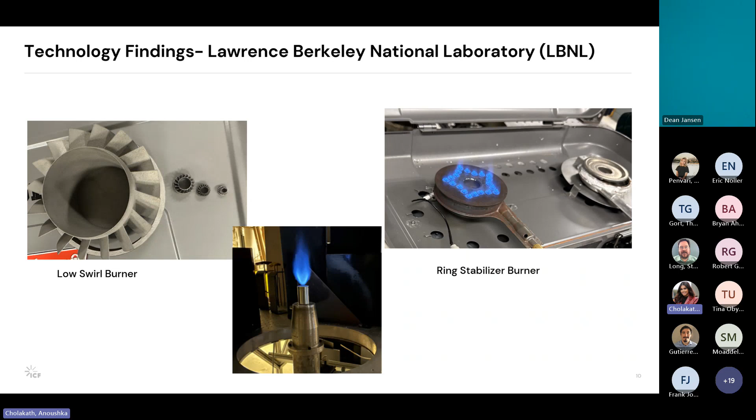Since then, they have looked into other applications such as water heaters, but as of the time this interview was conducted, development had stopped due to the pandemic and has not yet resumed to my knowledge. Overall, both burner types are scalable and fuel flexible. Scientists at LBNL have called for further studies to fully optimize them for specific applications.

Moving on, we interviewed experts from ClearSign. They are a burner R&D company developing burners for commercial and industrial markets. They have a patented technology which they call the ClearSign Core technology.

This consists of air fuel premixing, internal flue gas recirculation, and their patented distal flame holder technology. To my knowledge, this is the only burner manufacturer that uses this unique combination of combustion elements in their fuel burners.

ClearSign has 3 ultra-low NOx burner products. The first is their process burner. They have a partnership with Zeeco Incorporated to develop and sell the ClearSign process burner. Applications for this involve heavy refinery fuels up to 80% hydrogen.

ClearSign had expressed interest in looking into other applications using their process burners, such as steam methane reformer heaters and ethylene cracking furnaces.

ClearSign also has a boiler burner product. Rogue Combustion is the exclusive partner for selling this boiler burner, and I'll talk a little more about this in the next slide.

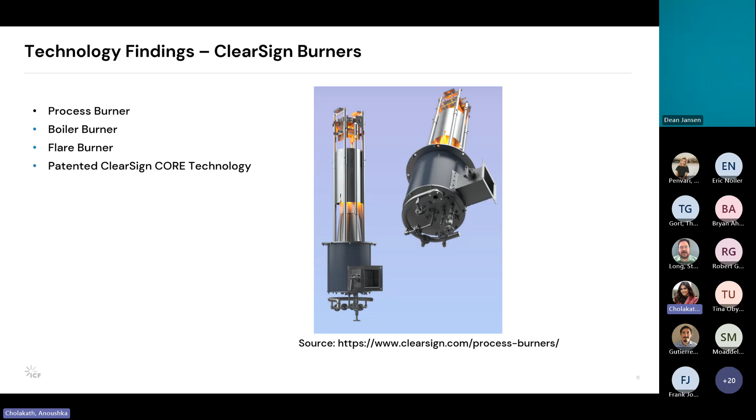As of when we conducted our interview with ClearSign, they have supplied 7 flare burner retrofits in the Central Valley for oil production facilities. ClearSign representatives have also stated interest in developing their product for other applications such as coker heaters, which are also used to deal with heavy crude oil.

As I mentioned earlier, Rogue Combustion uses the ClearSign technology for a fire tube boiler burner, and this product can be supplied for new boilers or retrofitted into existing boiler equipment.

We were able to conduct a site visit to their testing facility, and the engineers there were able to tweak the burner to operate right around 1 ppm NOx and demonstrate its operational flexibility.

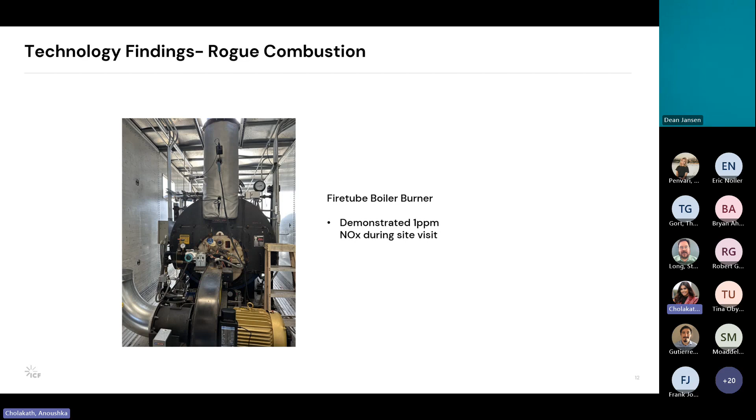From my conversations with the engineers, they have expressed interest in exploring other opportunities for optimizing this burner, as well as looking into water tube boiler applications.

The next organization that we interviewed was PowerFlame Incorporated. They have 3 commercially available ultra low NOx burner offerings.

The main features of these burners include a pre-mixed firing head in their Ultra C-Max burner and a metallic firing head in their NP2 burner.

Regarding the applications, the representatives we spoke to claimed to retrofit boilers with their ultra low NOx burners fairly often and have been pretty successful in doing so. They've also applied their burner to other process heating applications, such as furnaces, bath vaporizers for liquid natural gas conversion, autoclave ovens, and even distillery and brewery facilities.

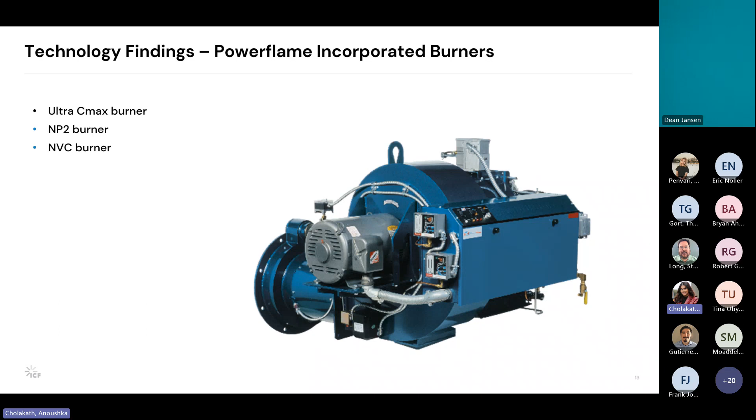Another company that we spoke to was Vitotherm. Vitotherm is an R&D company based in the Netherlands, and they are working on a new ultra low NOx burner line that is expected to be released by the end of 2023, and this would be their first ultra low NOx burner offering.

A unique characteristic besides their burners being ultra low NOx, they also have a zero carbon monoxide component since they're primarily focused on indoor applications, specifically greenhouses. Their main customers in California so far are the Greenhouse Valley and the Central Market, but they have expressed interest in looking for other partners and applications for their burners here in California.

Moving on, Honeywell has designed and fabricated the next generation of their Oxytherm burners. This technology uses a patented staged oxygen design, which they claim improves the overall heat transfer and can significantly reduce NOx emissions. This burner runs on close to pure oxygen as opposed to traditional burners, which use air, which is 21% oxygen, 79% nitrogen.

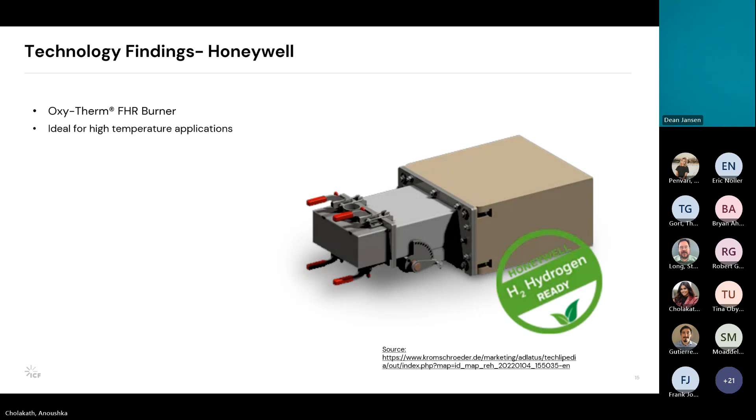This is another company we were able to connect with at the AHR Expo. They have two ultra low NOx burners, the tube burner and the inward fired cone IWFC burner. They use a proprietary metal mesh firing cone for their burner system to help with efficiency and NOx.

They've applied this technology in a variety of applications, but particularly a lot in the commercial food service industry, including coffee roasters, baking ovens. They've also installed this burner for industrial applications, including furnaces, paint curing, sugar condensing, as well as outdoor IR heating.

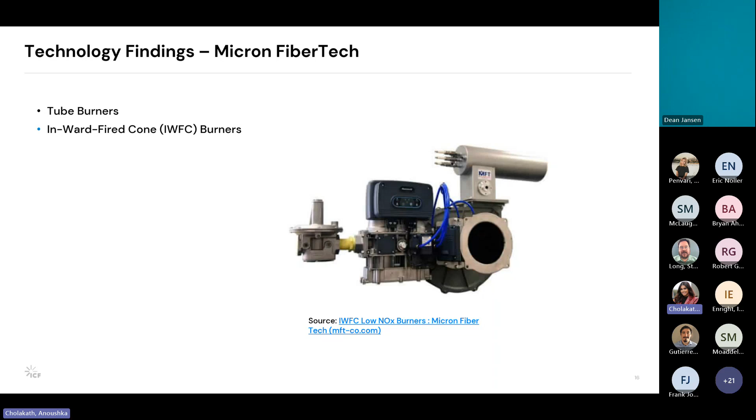Next is Cleaver Brooks, and they have an ultra low NOx burner model called the SBR5. Their technology uses a forced draft design, which controls the air and the fuel mixture, resulting in near complete combustion with near zero carbon monoxide emissions.

There are a variety of applications that this burner can be used for. They've successfully applied this to boilers, industrial processes, waste heat recovery. They've retrofitted this burner into a hospital for steam usage, laundry, dry cleaning, as well as refinery and petrochemical applications.

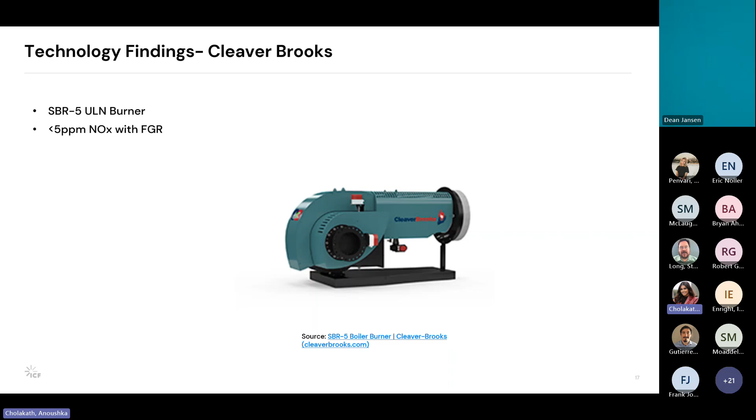CIB Unigas is an Italian burner R&D company that offers ultra-low NOx burners in parts of Europe. But they have very recently installed their first burner in California as of earlier this year. The burner that they recently installed was not an ultra-low NOx burner. However, they are working on developing their ultra-low NOx burner line and are currently in the design phase of that.

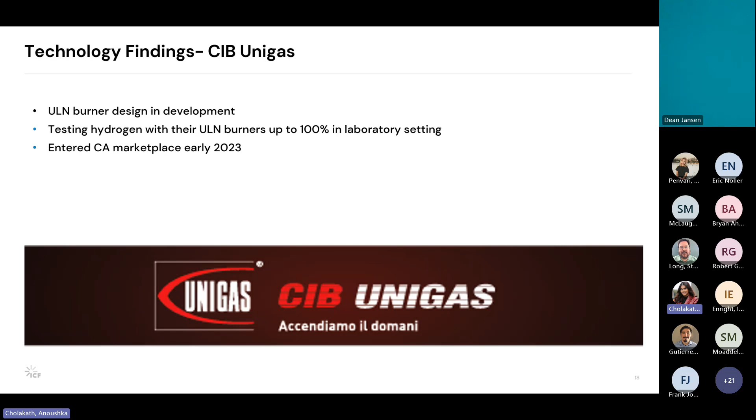In a laboratory setting, they have tested their burner up to 100% hydrogen fuel and are using a mix of staged combustion design and flue gas recirculation to achieve the ultra-low NOx levels required here in California. I don't have an exact timeline of when these burners will be commercially available, but they did express interest in expanding into the California marketplace.

So the last couple of companies mentioned here, we were not able to get a hold of them for a longer interview or a site visit. So most of this information is purely from research conducted at this point.

Alzeta Corporation offers a few ultra-low NOx burners. Their burners utilize a pre-mixed surface-stabilized combustion process that offers uniform heating to operate at very low combustion temperatures. The CSB burner is a metal fiber burner, and the Duratherm burner uses a ceramic fiber specifically used for applications that require a low heat flux and uniform heating.

The Alzeta NanoStar burner was developed as an ultra-low NOx solution for industrial gas turbine applications specifically.

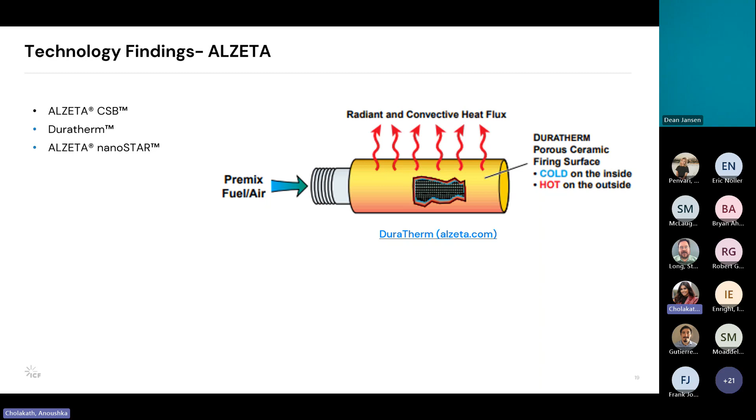Moving on, Altex Technologies is an R&D company that focuses on combustion systems, and they have developed the next generation ultra-low NOx burner along with support from the CEC, and they call this the near zero NOx burner. This technology is a multi-flame zone burner that integrates a post-combustion NOx reduction process as well as an in-furnace NOx reduction process, allowing them to achieve emissions under 5 parts per million.

In their report, they've also noted that this burner can be commercialized and optimized for boilers, water heaters, and process heaters.

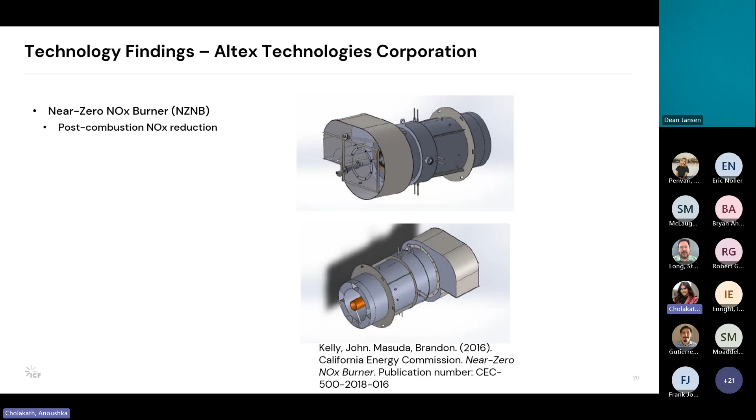All right, Linde Technologies offers what they call a flameless oxy-fuel burner. They have recently improved their oxy-fuel combustion process to meet the stricter emission standards. Like the Honeywell technology, this product also operates close to 100% oxygen instead of air. They've also tested this burner with hydrogen as well.

They are currently planning a field demonstration for this burner using 100% hydrogen fuel in a steel producing furnace. As of when the research was conducted, this field test hasn't happened yet, but I would say stay tuned for that, or reach out to the company for more details going forward. This is something they have planned for hopefully later this year.

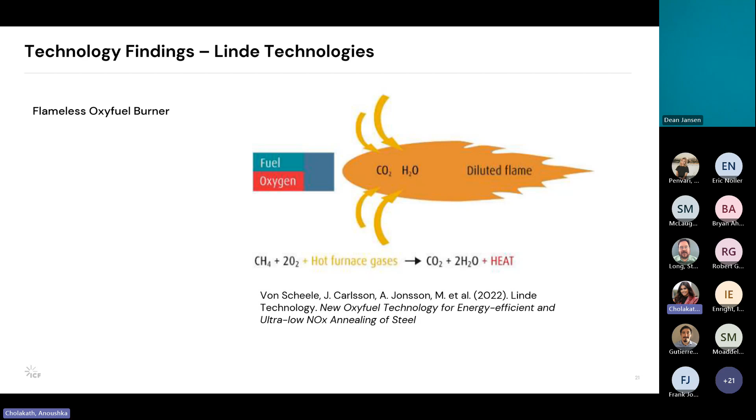Moving on. The Swiss Federal Laboratory for Material Science and Technology have developed what they call the catalytic hydrogen combustion burner. This process uses a catalytic approach using platinum-coated silicon carbide foams with non-premixing hydrogen and air.

The way this works is hydrogen is supplied from below and air is blown between the two platinum-coated silicon carbide discs, which leads to a homogeneous air distribution and a uniform catalytic reaction of hydrogen and air. In a lab setting, the scientists were able to perform tests at various hydrogen flow rates.

They have expressed interest in further development for industrial manufacturing for stoves and other commercial cooking appliances, which is currently in progress. We weren't able to get a hold of them for any further updates since when the study was published.

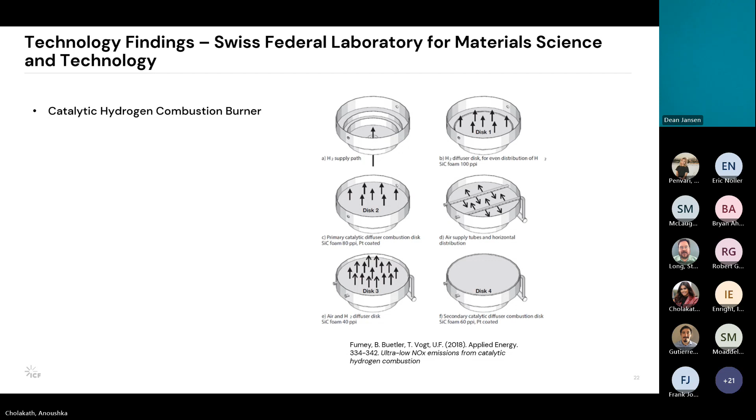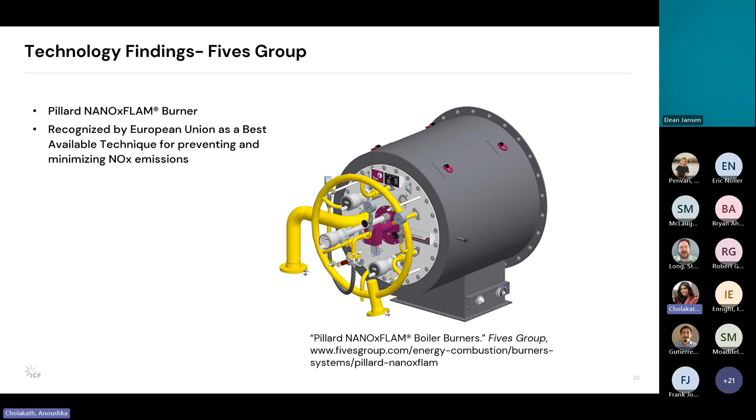All right, the Fives Group is another company that specializes in machinery and processing equipment. They have designed and manufactured what they call the Pillard NANOxFLAM Burner, and this uses a unique patented technology to control the flame temperature and improve efficiency. This burner was recognized by the European Union as a best available technique for preventing and minimizing emissions. The main market for this ultra-low NOx burner is primarily in China and Korea. They've applied this burner for both fire tube and water tube boilers.

All right, moving on. John Zink Hamworthy Combustion has a few ultra-low NOx burner offerings. Firstly, their Coolstar burner uses their proprietary flue gas entrainment and air and fuel premixing technology to control the flames and achieve low emissions. This burner is mainly suited for larger processes like coker heaters, crude and vacuum heaters, and ammonia and hydrogen reformers.

The next burner offering is the Solex burner. This one has the lowest emissions of the three, around 5 ppm, as well as near zero carbon monoxide emissions. The Solex burner uses their patent pending air mix and cool mix combustion process to create a shorter compact flame length, which they claim to be very efficient.

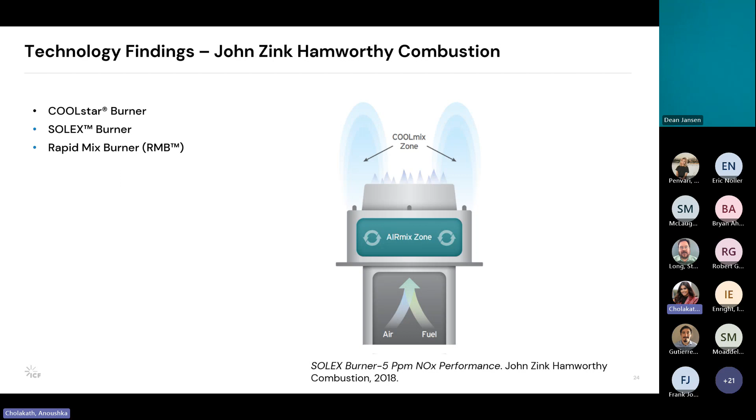Finally, the Rapid Mix burner uses a gaseous injection and mixing system that they use to maximize efficiency and help lower emissions to under 9 parts per million of NOx. This burner is suitable for both new boilers as well as retrofitting into existing units. They've also applied this for furnaces and dryers.

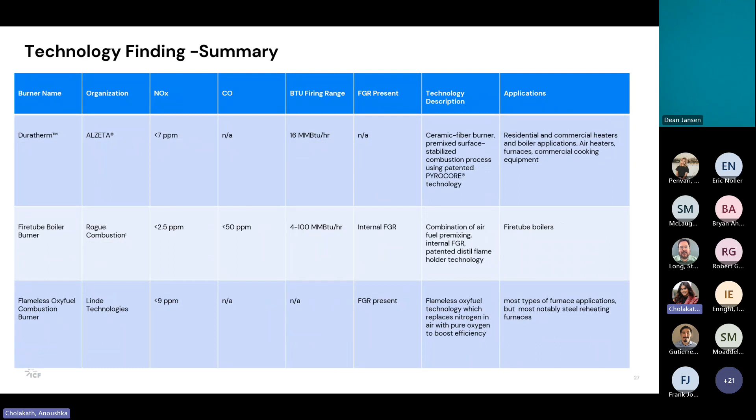So what I have here is pretty much summarized every model that we talked about. This table is also available on our final report, and it just sort of breaks down everything that we've gone over with all of the different burners.

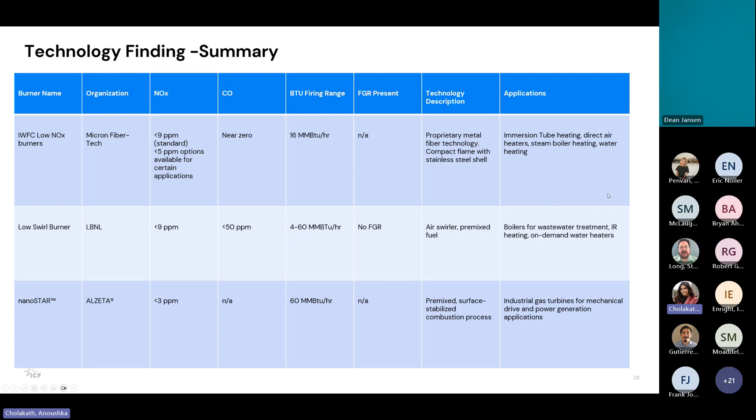Probably a little bit easier to follow. You can feel free to download the report and save this table for reference. We've summarized the NOx for each burner, the BTU firing range, as well as a brief description on the technology and the applications.

Okay, moving on to hydrogen blending in ultra-low NOx burners. Based on this market study, we identified a number of next generation burners that have been tested with hydrogen and natural gas blends. There's quite a handful of them. I've listed the burner name here as well as the organization and the percentage of hydrogen that they have been tested with.

Based on the interviews with the different burner experts that we had earlier, they've called for further testing to include NOx emissions in field trials where hydrogen and natural gas blends are being deployed to better understand the true range of NOx outcomes in higher hydrogen blends. But for the most part, the manufacturers were extremely interested in testing their products with hydrogen. Based on the interviews, there seems to be a lot more interest in using hydrogen gas as a fuel going forward.

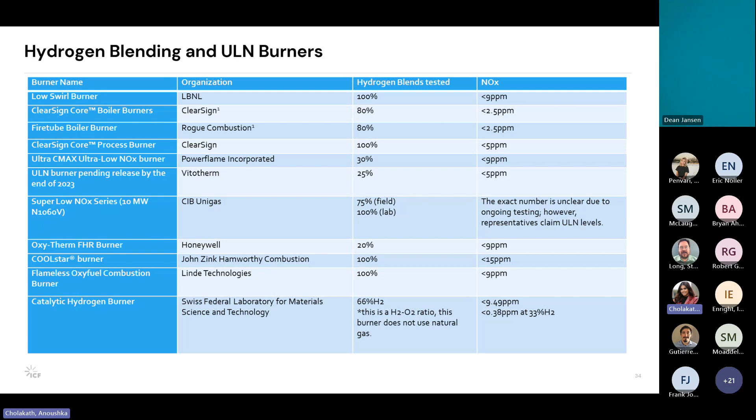To summarize, we identified a total of 25 ultra-low NOx burner models from this market study. Based on conversations with manufacturers, most of their burners have been easily retrofitted into existing equipment, such as boilers and furnaces, without having to change an entire unit or a lot about the appliance. Most of the burner technologies include some sort of proprietary combustion process to increase efficiency and achieve ultra-low NOx emissions.

We found that 11 ultra-low NOx burner models have been tested with hydrogen blends ranging anywhere between 20% to 100% hydrogen.

I want to talk briefly about some of the barriers manufacturers have expressed. The first is regulatory challenges. In particular, the San Joaquin Valley Air Quality District has adopted what they call the best available retrofit control technology rule. This rule states that if businesses achieve lower NOx emissions than originally mandated, then all newer permits must meet this achieved-in-practice limit. So this rule establishes a moving target for NOx emissions, and businesses aren't able to receive new permits unless they meet the lowest industry standards. A variety of manufacturers have said this was a huge hurdle for them, and the moving NOx target has essentially resulted in a loss of income for some of them.

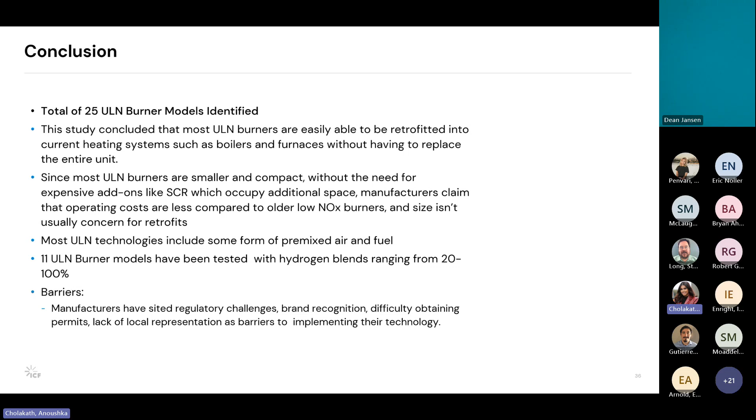Project recommendations: further cost analysis to help quantify the benefits of ultra-low NOx burner retrofits is recommended to further encourage its adoption. The study also recommends further testing of hydrogen blends with ultra-low NOx burners and different equipment, to demonstrate how these burners will perform in older equipment as well as higher percentages of hydrogen as a fuel.

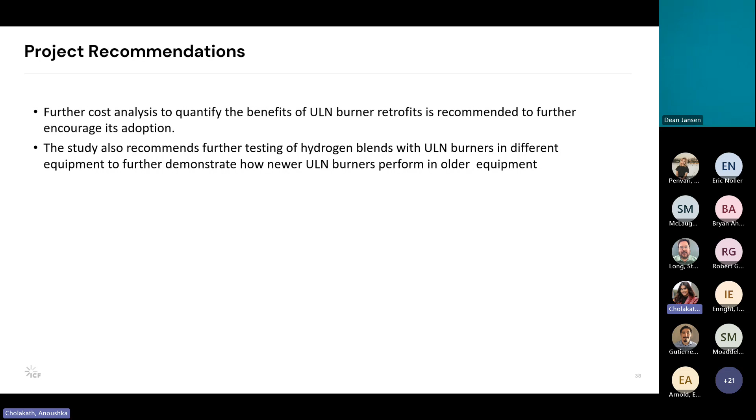The GET program is currently working with one of the manufacturers mentioned to do some emissions and efficiency testing on an ultra-low NOx burner as part of a separate project, so stay tuned for that. That concludes the presentation. Thank you for listening, and if you have any questions right now, I'm happy to answer them.

I think I saw a hand—have a question. Go ahead, Anoushka. Crystal. Hi, Crystal. Hey, this is Crystal.

For the ClearSign burner, has it been installed in any wastewater treatment plants in California or in the US at all?

I am not too sure. I can reach out to some of the contacts at ClearSign and get back to you about that. I think I may have seen someone from ClearSign on this call—not sure if they're still here or would be able to answer that question right now, but if not, I will reach out to them and get back to you. Okay, great.